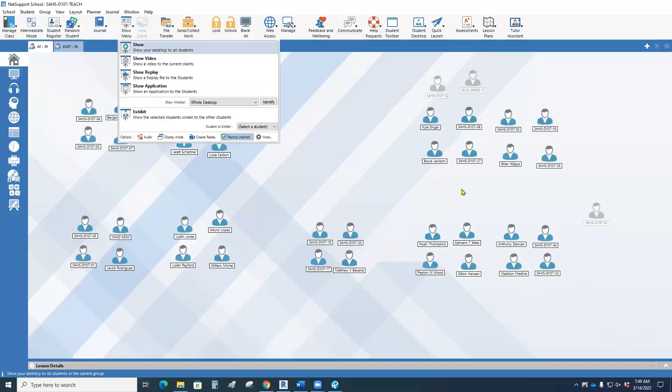Okay, first off, the checklist for what we're going to do today is on page 383, interior elevation checklist in the Revit book. I'm going to drop this over on the other side just for reference.

And I'm going to open up. Let's see, who's the volunteer today? It is Ben. Yes. All right, so this is Ben's working. He's got a working level 1 and a working level 2. Ben's project is pretty good, actually. I'll pick on him just a little bit, but it's looking pretty good.

So we're going to do the interior elevations of this thing, and I have a checklist for you. We're going to do things like vertical and horizontal dimensions, because there's no way we could dimension all the stuff that's in here on the floor plan, right? It'd be a nightmare, it'd be awful. It's hard enough to keynote it, never mind putting dimensions and tags and stuff like that in there. We're going to tag everything, and I'm going to give you acronyms for the tags.

We're going to deal with things like upper cabinets and base cabinets. We will deal with outlets and switches, so the electrical will be on. You can't have the switch inside the cabinet. Right now you guys just put them wherever, so we're going to have to tell them where they are vertically.

So, no color thing. We will do keynotes. Most of the keynoting should be easy because you've already done it, so now it's almost just a little redundancy there. And then some of it will be, oh yeah, I haven't done that one yet, so there'll be some addition. But again, most of this is going to be easy.

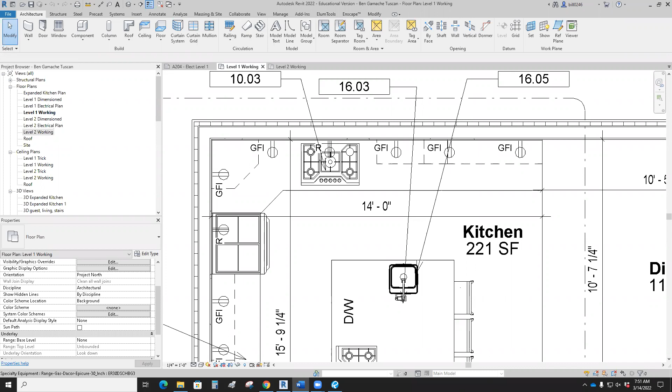All right, so here we go. Let's start with the kitchen. So this is the way I would like you to deal with the kitchen. In fact, I'm going to start it off this way. Let's go to the individual items here and let's just kind of pick them off.

So, view, elevation. I don't think we've done any interior elevations in here, have we? I don't think so. And we're going to do an interior elevation—that's going to put it into a different folder than the building elevations, and the annotation symbol will come out looking a little big and awful.

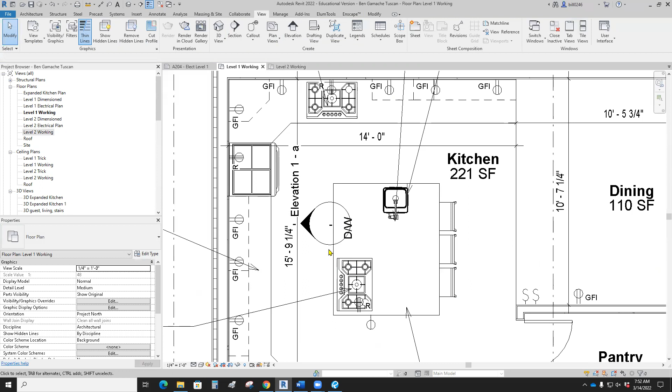All right, I'm going to go ahead and point at this wall back here. Now, what I don't want you to do is make a separate elevation for this wall and a separate elevation for this wall and a separate elevation for that. Make them like this—watch the screen. So I've got this first one here and it's going like that. You've seen these before, right?

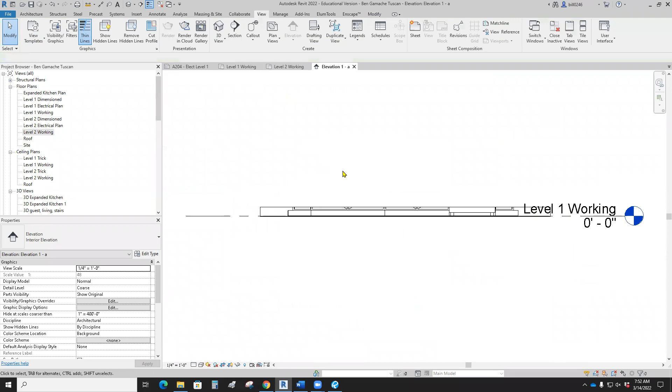I'm going to move this just a little forward here and right click and go to view. And it'll look something like that. All right, notice I pulled it up. And then let's go back to the floor plan.

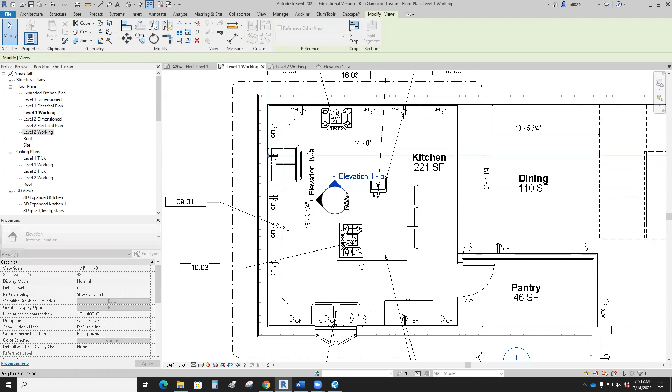So I've got my first one, and then what you're going to do is hit this little checkbox, and that's going to give you another one. I'm going to move that up, bring it over, and go to the view.

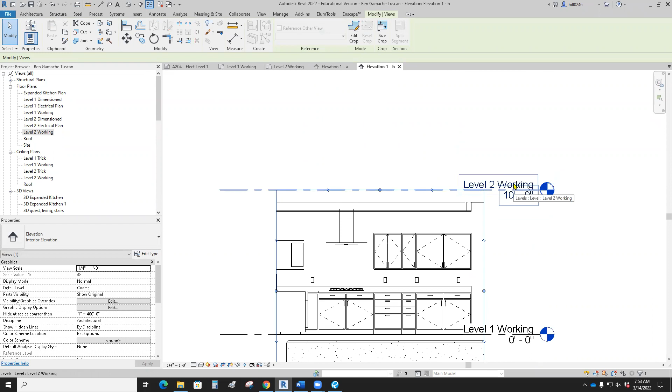What I don't want—I don't want this. I want it to go all the way down just to level 2, because if you do this, you're going to end up getting these things on your top floor, which you don't want. Okay, and back we go. Let's go back to that first elevation here.

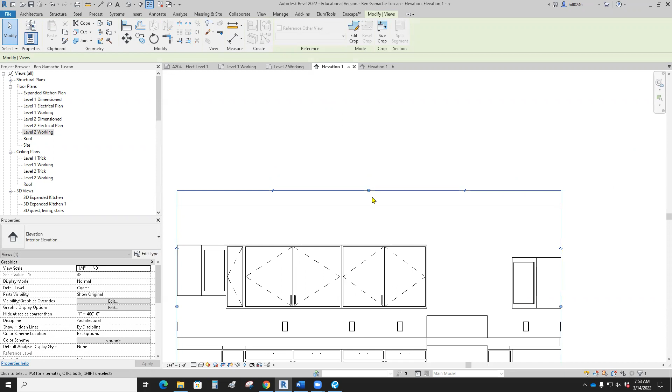Do you see where I'm going there? In theory, you don't even really need to have that floor showing. You could bring it down like that if you wanted to. I like just bringing them up to the level line.

Now, when you do these things, it's going to make it as long as it makes it. It doesn't really know how far you want to go. What I want you to do is make common sense. Where should this one go? Well, it should go along this wall. Should it go into the pantry? If it doesn't, then don't put it in the pantry. If it should, then put it in the pantry. That's completely up to you.

So you guys have a little bit of judgment there on what you're going to do. And again, they're going to come at different heights. You don't want it to do like this, because what you're going to get if you do that, watch this, you're going to go and you're going to get, see what's going on here? So you're getting the elevation marks in this upper area. I don't want those. Does that make sense? See how they're coming up because they're in level 2.

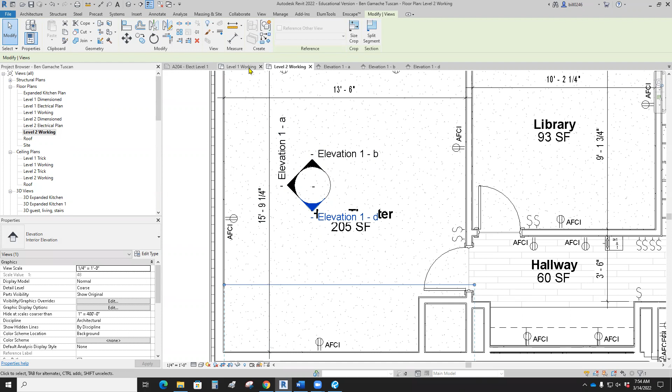Now watch this. If I go back to level 1 working, actually let's do it from here. And if I just move it down just a little bit, watch this. I'm going to go down. I want to get this ceiling, but I don't need to get this floor. Now, when I go back to level 2 working, notice that one of them is gone. Does that make sense? Because it's not in level 2 anymore.

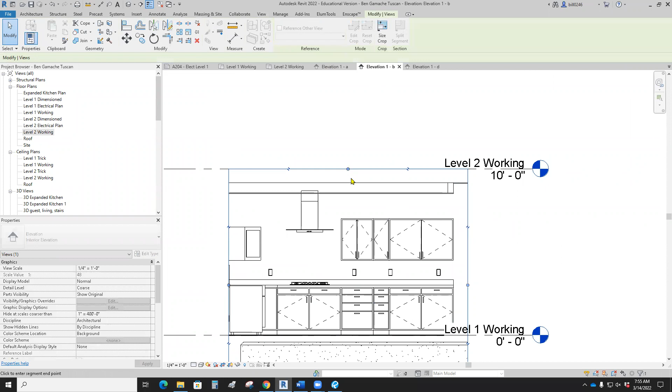Let me go back to this elevation 1B. I'm going to pull it down a little bit. Again, I'm not pulling it down so far that I'm missing the soffit. But now if I go back to level 1 working, you'll notice that one of them's gone. Now I've got one more left, right? So if I go back to, was that D? And I pull it down.

So it's not involving level 2. Now, when I go back to that level 2, you'll notice that that thing's completely gone. Do you see what's happening? So if you make it too high, it goes up into the next floor, and we don't want that.

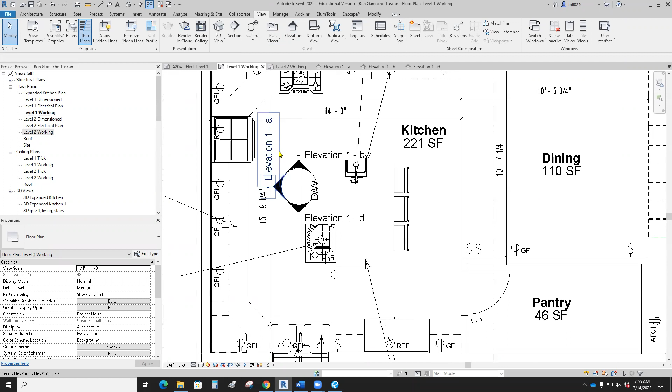Clear? Okay. Let's see, back to level 1 working. So I've got the 3 there. What I would probably do here is create a new sheet. We'll call this A701 because it's going to be 700s. I'm not sure how many sheets there's going to be here.

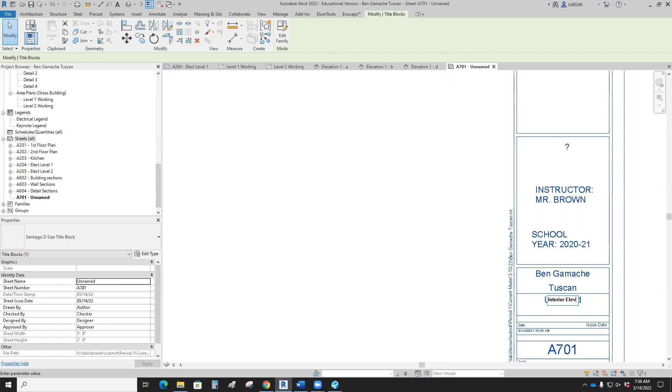And I want the interior elevations to be at 1/2 inches a foot. It's going to be a quarter because quarter is what you were in when you did them, but I need to double that, 1/2 inches a foot. You'll notice that things get a little smaller. 1/2 inches a foot. 1/2 inches a foot.

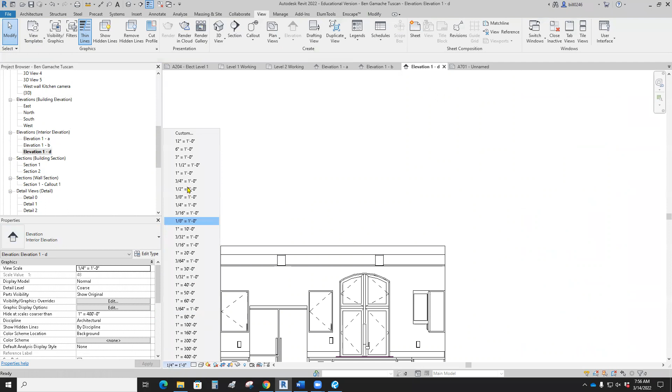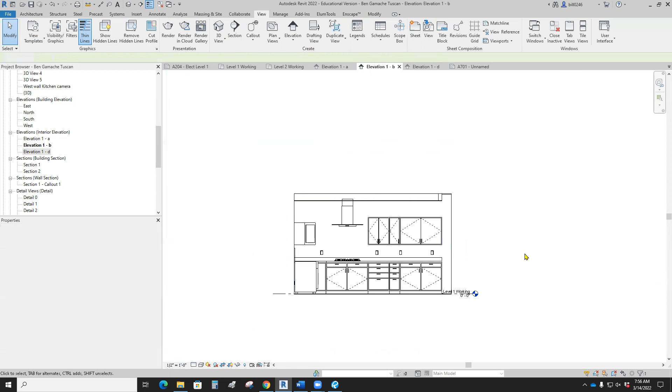So far, so good. Now, we probably don't need this stuff on the bottom here either. I would probably pull that up to, here. We don't need, again, crop all that stuff out because all we're looking at is the stuff on the inside. See where I'm stopping at level 1 working. Again, don't need to see the foundation. Is that good? Looks pretty good.

Okay, and then you're going to drag them onto a sheet. Now we'll get the names later. For right now, it's going to get them like this. So, I don't know. Is that big or not? You tell me. So I'm just going to plop them on. How many can I get on a sheet? Depends on the room. With me?

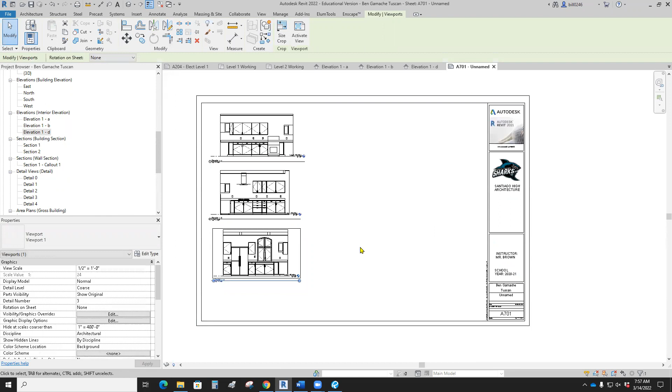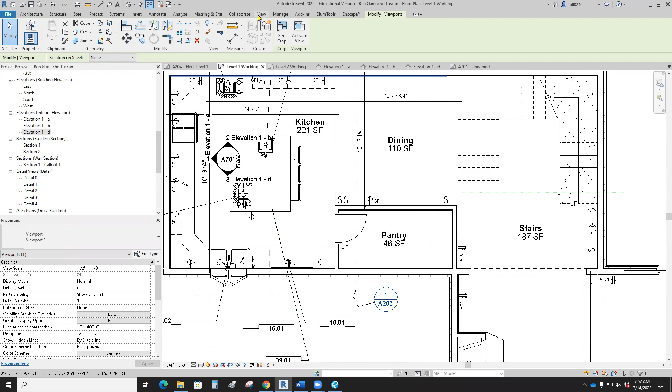Let's go back to level 1 working. Now, how are you going to deal with the island? So the island, I really kind of need most of it, I guess, especially if it's like this, where it's all 4 sides. So if you want to do all 4 sides, you're going to bring in another one. So view, elevation, just watch the kind of the process here. I'm just going to go ahead and point there.

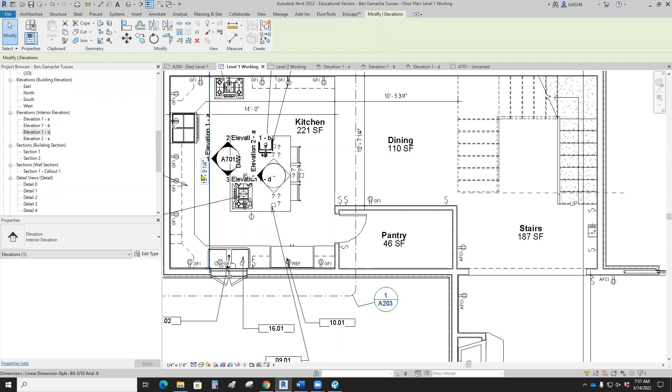Not sure exactly where to put this, but I'm just going to go ahead and say drop it right there. Okay, don't worry about the names. We'll get rid of those in a minute. So what I'm looking at now is I'm looking that way, right? I want to each one. If you see where I'm going with this.

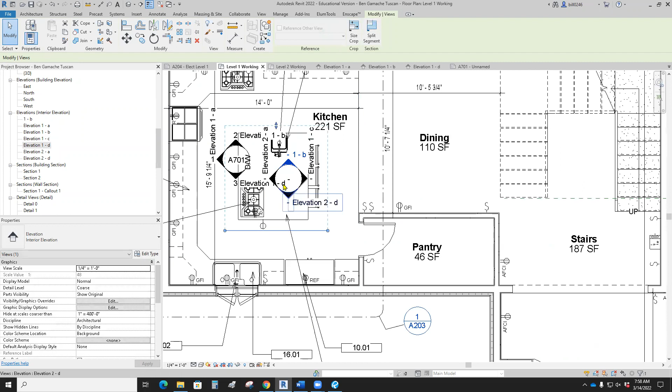So on this one, I want to look at the island this way. So you just use your crop regions. Does that make sense on the pointing? I know it looks weird because it's kind of behind it, but it's really the only way we're going to be able to do it. And then this one would look this way. Try not to get that stuff in the background. And then this one, crop it.

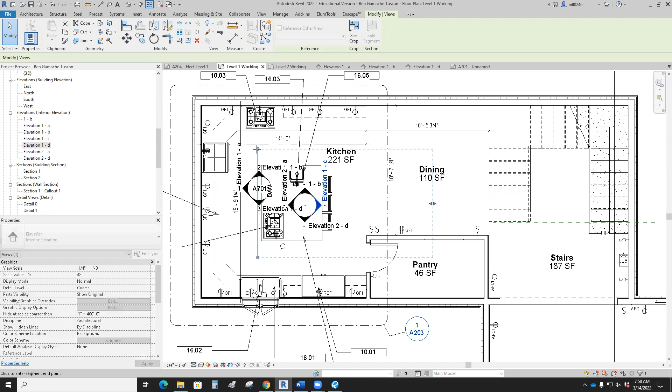And lastly, was it this one? I'm going to move it back, like so. I know those names are there, we'll get rid of those later. They're really annoying right now, but for right now, leave it like that.

And then you're just going to start moving around on the stuff that I'm asking for, on the fireplace wall elevation, elevation, point to it. Yeah, pick up, that's pretty good actually. Like that, that'll be one we have.

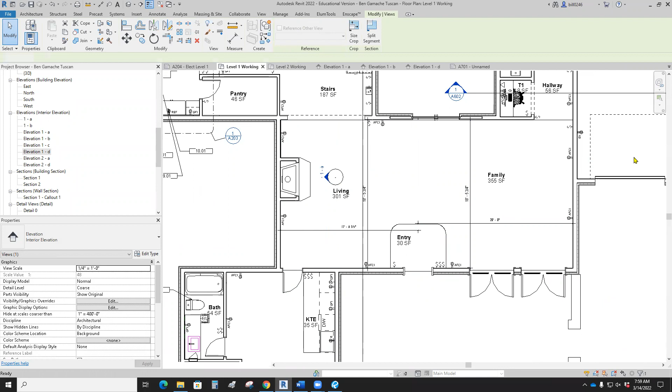Don't know why it does this, but it does. You have to stretch it up, and just again stretch it up so it's going to level 2, but not quite. So that's too high - get it so we can see the ceiling, but not the subfloor.

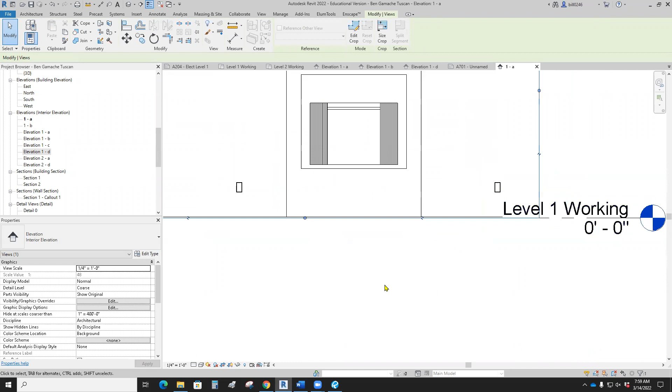Doesn't really matter because we get those in section views. And then this would just go right to the bottom, so you see your finished floor, but you're not going to see the subfloor underneath.

And scale, 1/2 inches a foot. So you're going to have to go through all of these and make sure the scale is correct.

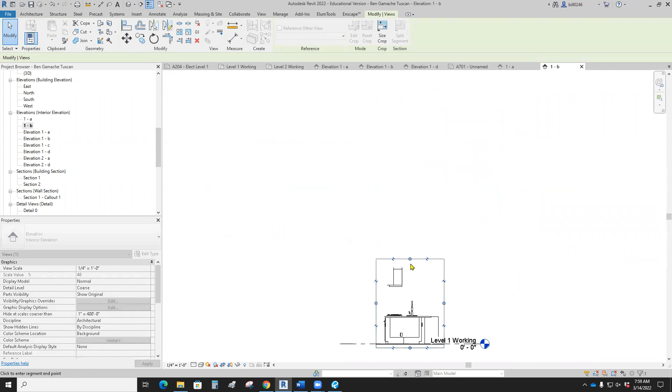Is that making sense? Some of it, you're just going to see what you see from the side. We'll pick up things like outlets and things like that on the side. I think we have that little fake wall right there - on that one, we just right click, hide in view element, and that way we wouldn't see the wall, but we'd see the outlet on the wall.

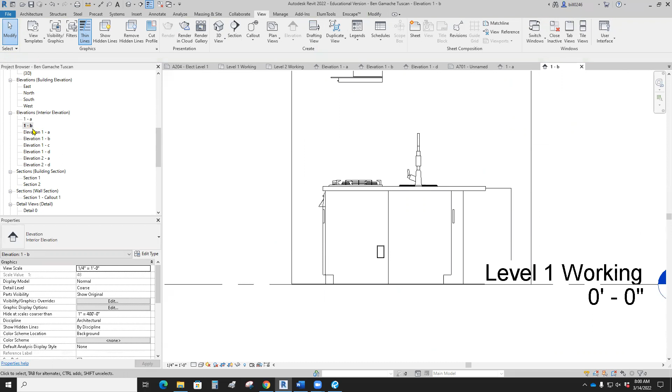Let's see, again don't worry about the names, we'll get the names later. Things like range hoods and all that stuff will get picked up in this view.

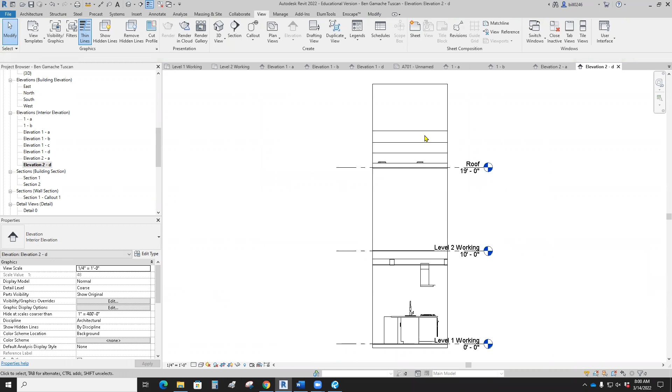That's pretty good right there. And one more. All right, getting the basic idea here. And then you're just going to go in on all of the rooms. Let me just do one more room and then I'll turn you loose.

How about a bathroom? Now, some of yours might not be done, and I'm well aware of that because this thing is not completely done. But you're going to have to add a few things now that we do the interior elevations.

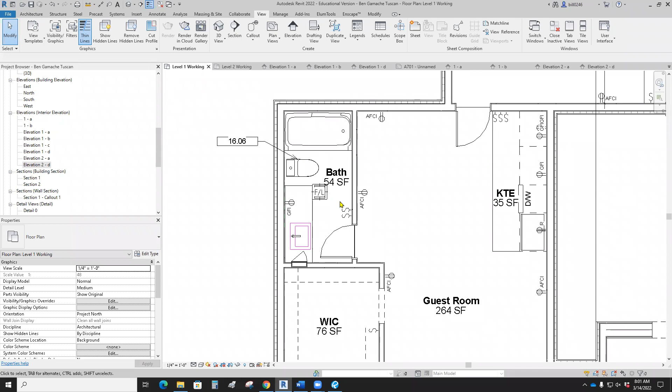On this bathroom right here, I might only need one. I guess in theory you could do a couple, but if I look at this wall right here, I'm going to pick up quite a bit. I might need to turn it around if there's towel bars and stuff over here. But the idea, like I showed you earlier, is to pull that back a little bit.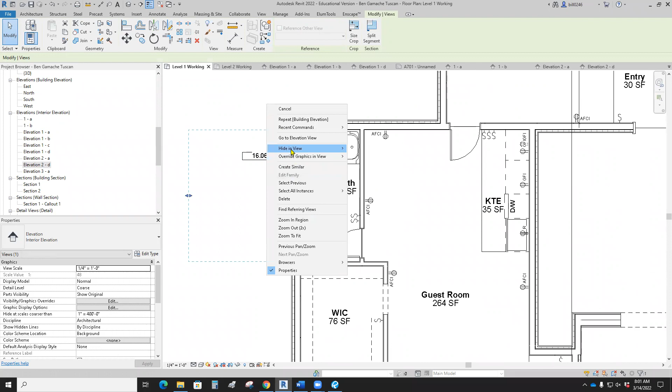You know, see all your stuff. And this is where we're going to pick off the verticals, which we don't have. We didn't really want to have the horizontals either. We have dimensions stuff we need to put in here.

We're going to set all these to 1/2 inches a foot. And I would say view display fine - that way you see all the plumbing fixtures really pretty well.

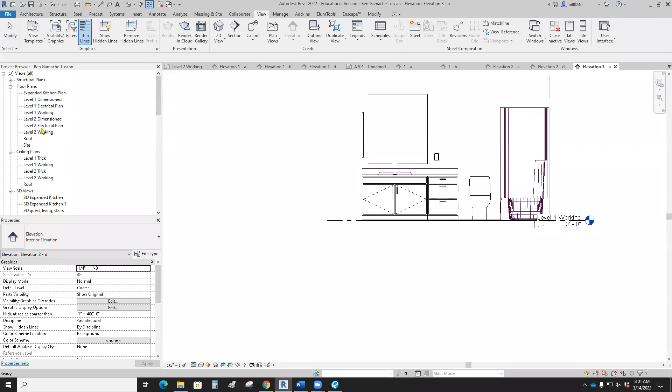All right, so I would like you to just start making a whole bunch of these interior elevations. I'm well aware that they're going to be super annoying in your working drawings because these are at 1/4 inches a foot, so these things get really big. But let's start knocking some of those out.

Well, no, it's all about the scale of the drawing. So what we do - have we done expanded plans in here?

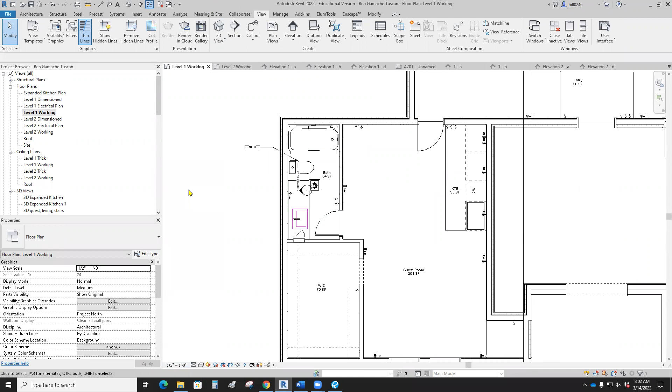So that's what they do. So if they did an expanded bathroom plan, they would do that. And then the scale of the expanded plan would be 1/2 inches a foot, and all of a sudden those things are smaller. So it's all about the scale.

It's not about the annotation object. So when you do expanded bathroom plans, like in commercial, and there's a lot of stuff inside there, you can't do 1/4 inches a foot. It's impossible, because you get these gigantic annotations.

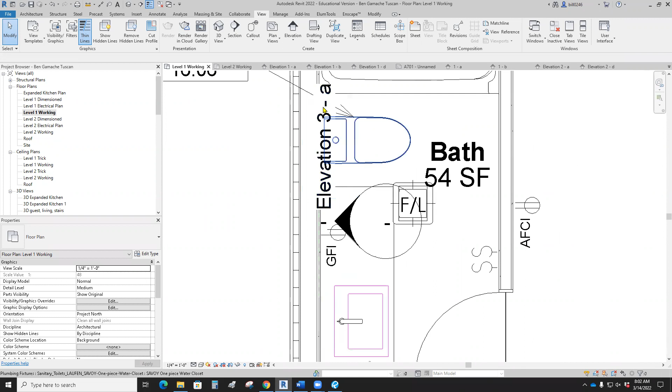Yeah, don't worry about these things right here, I'll show you to get rid of those later. So I just want you to start popping in a few, and that will kind of lead me to my next part of the demo.

All right, start with the kitchen if you would, and then work anywhere else you want, maybe bathrooms or something. All right, let's go maybe a half an hour.